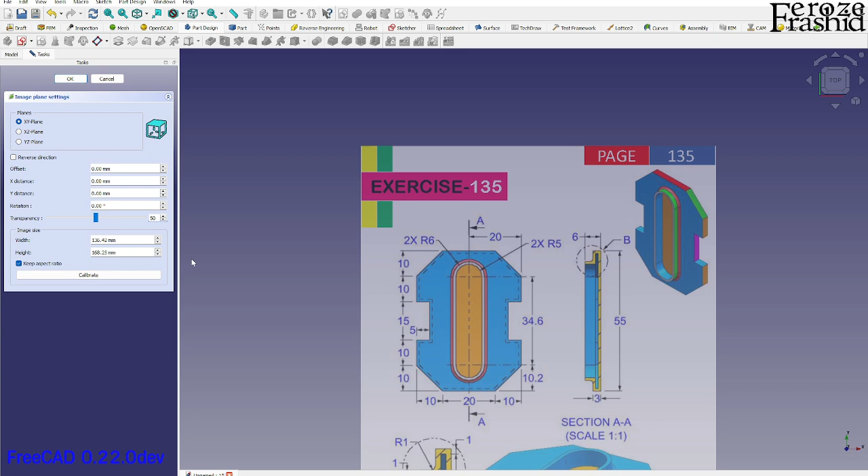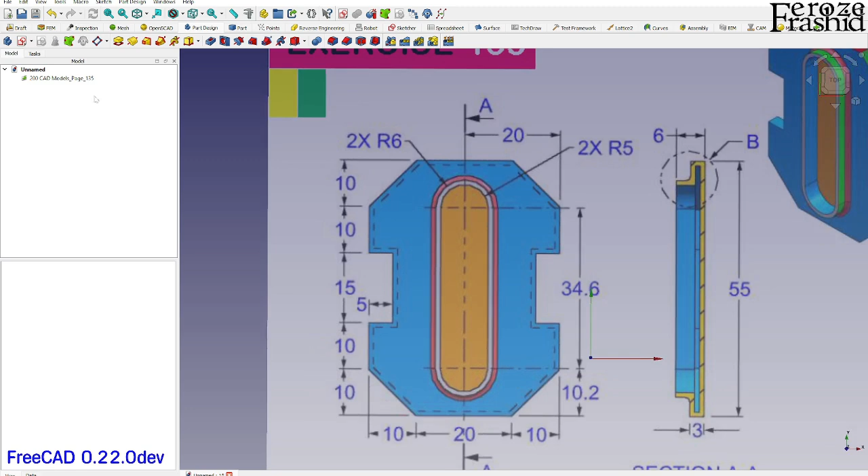I already worked on this in part workbench a couple days ago, and a suggestion was that this model building tree would be more efficient in part design workbench. So I had a little time, let's give this model a try in part design, which has a cleaner workflow especially.

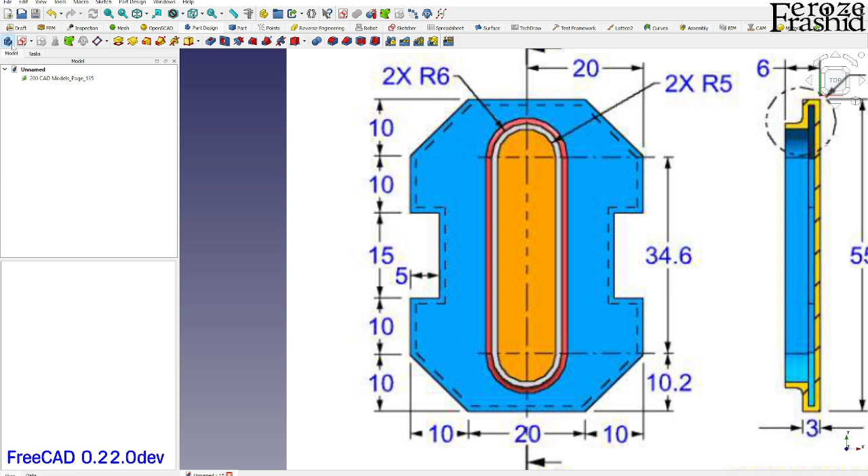Since we're going for an efficient way to build this, I want to build the whole thing with no mirroring involved, using this 0.22 developers version. In part design, I make a body and create a sketch on the XY plane after the generic setup.

I want to do the whole outside real quick, so it's a quick sketch of the outside using the polyline.

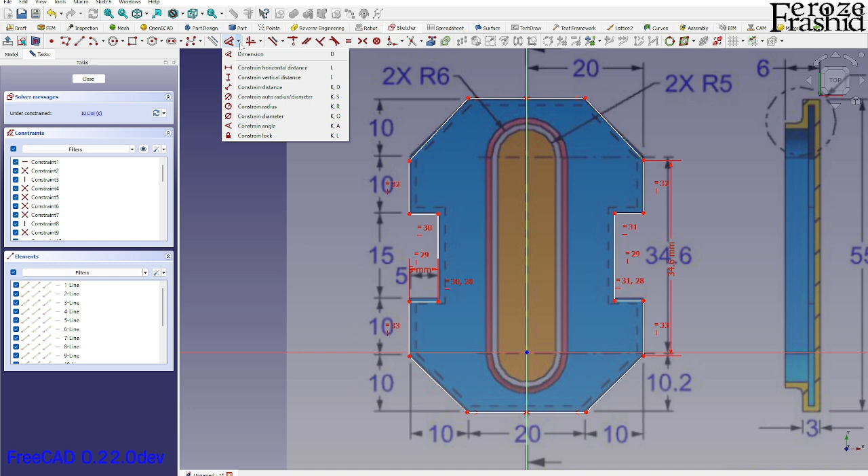All right, so I got the outside. I want to make this fully constrained, starting with this one, maybe 5. I'm using a lot of keyboard shortcuts, and the developers version helps with this process. For dimension, the smart dimension shortcut is D, and it applies the suitable dimension as it sees fit, though there are other options too. Now this is fully constrained, and we got the outside sketch boundary.

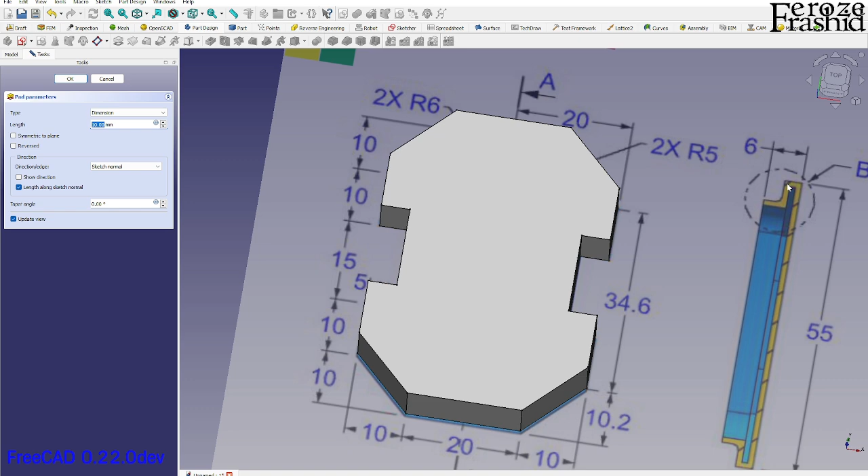That's one sketch, and I want to extrude that up for the whole 3 millimeters. I'll pad it for 3 millimeters.

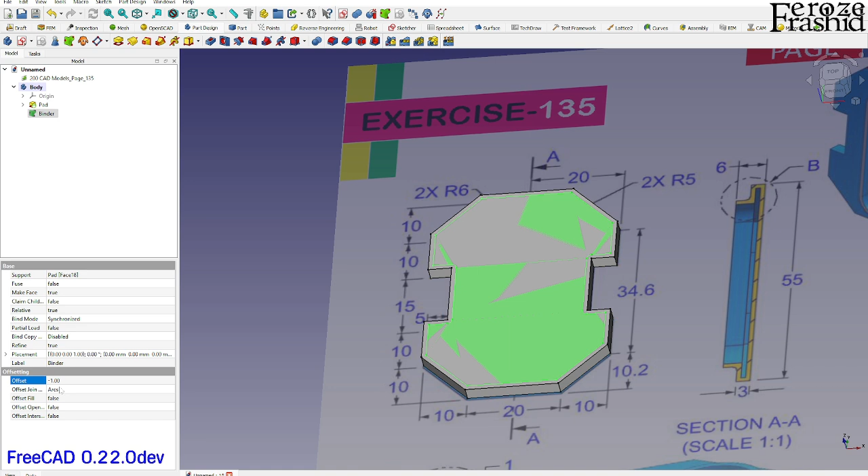Now we'll make 2 holes in the middle and another pad on top. This gap starts 1 millimeter from the bottom and finishes 1 millimeter below the top. I'll do that as a sub object shape binder, then offset this by -1, which is the wall thickness, and make it tangent for a sharp corner. Now this binder is sitting on top of the object, which is 3 millimeters.

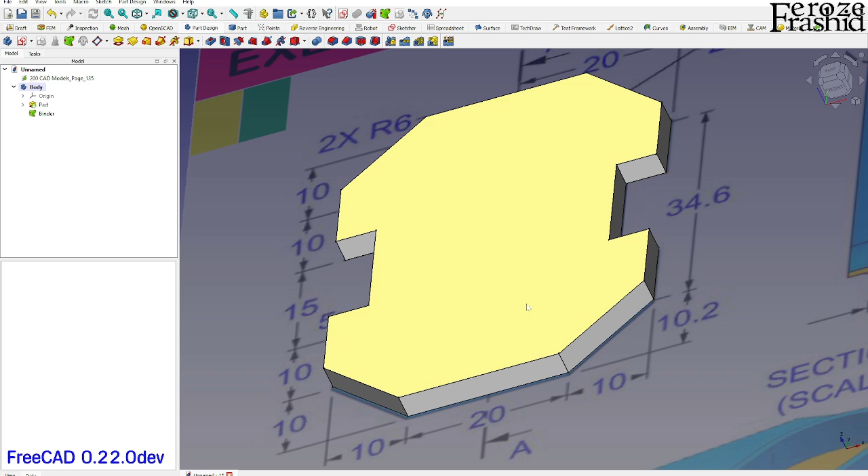I want to actually place it 2 millimeters down, so let's make it -2. Now you don't see it because it's inside there, but if I hover over it, I can see it's where we want it to be.

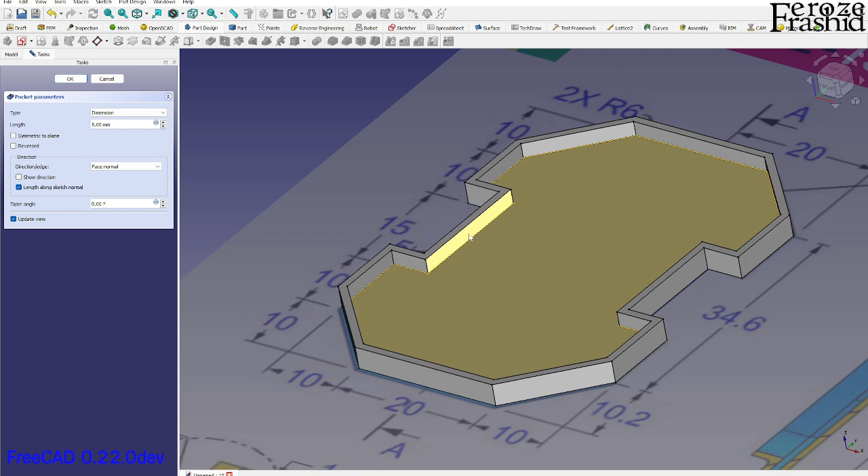Now I want to make a pocket. It's creating this whole thing because it's taking it upward, and the length dimension is what we want - lengthwise we want 1 millimeter is enough. Hit OK.

So now we have a pocket in the middle, and we can see how it looks if we take the body and make it transparent.

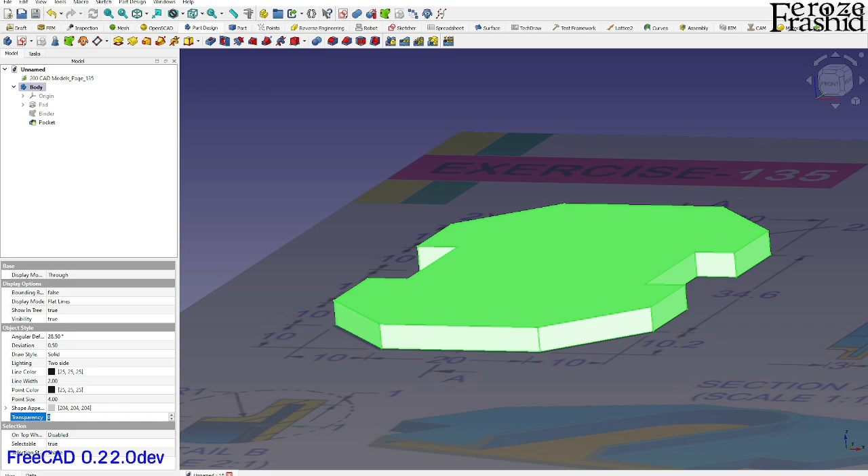By the way, if you hear a baby crying, that's my newborn, so consider that part of my video.

I don't see anything changed. Okay, transparency 50%, and I think the gap is there. Yes, if we hover over it, I can see there's a gap in the middle.

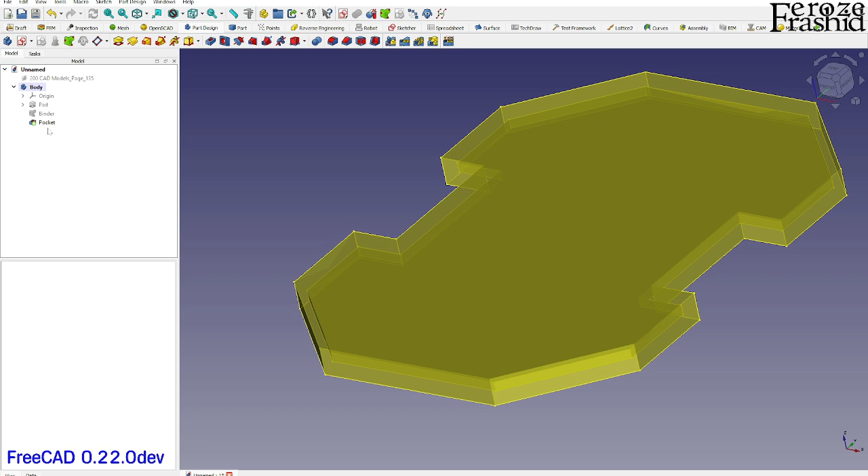Give me a minute, I'll make that more visible. The next step is to actually make that slotted hole, which we will draw as a slot on this face.

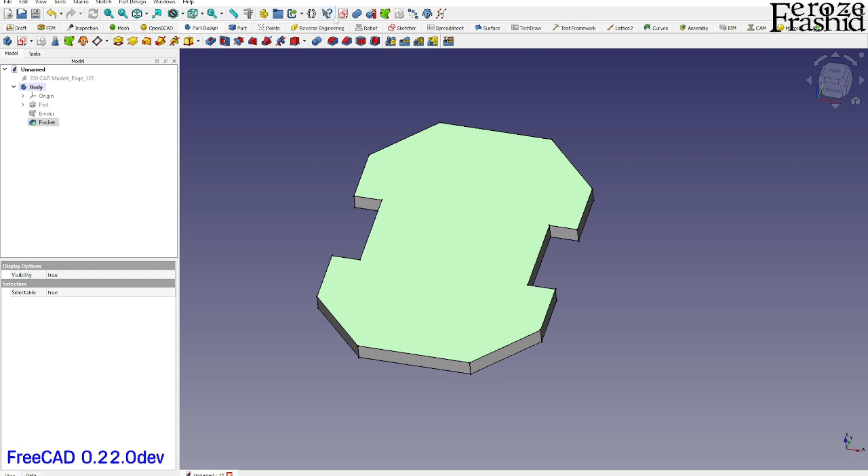I have the sketcher on my global toolbar, but that's from the sketcher workbench. I want to use the one from part design, because this places it inside the body we're working in - the other one places it outside. I'll use this one and draw a slot.

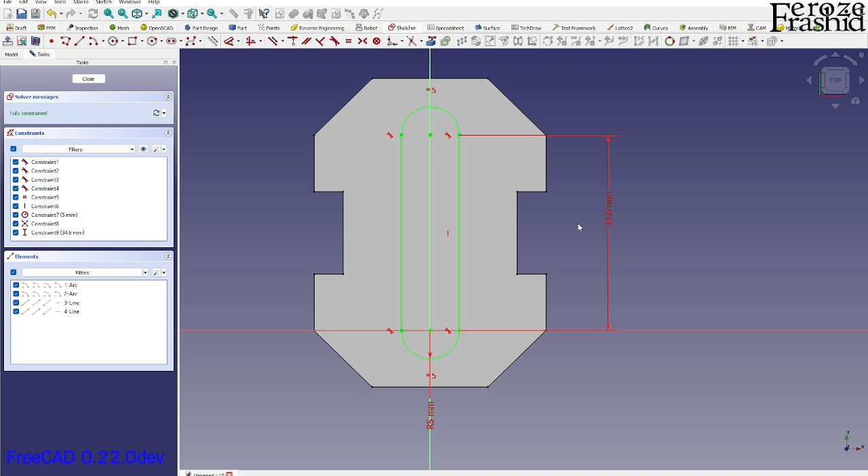This time it will just be a simple slot, and the radius I'll go with 5, and I'll verify that. I think this was 34.6, was it? Let's take a look - yes, 34.6, and the radius was 5. So we got it 5 on this one.

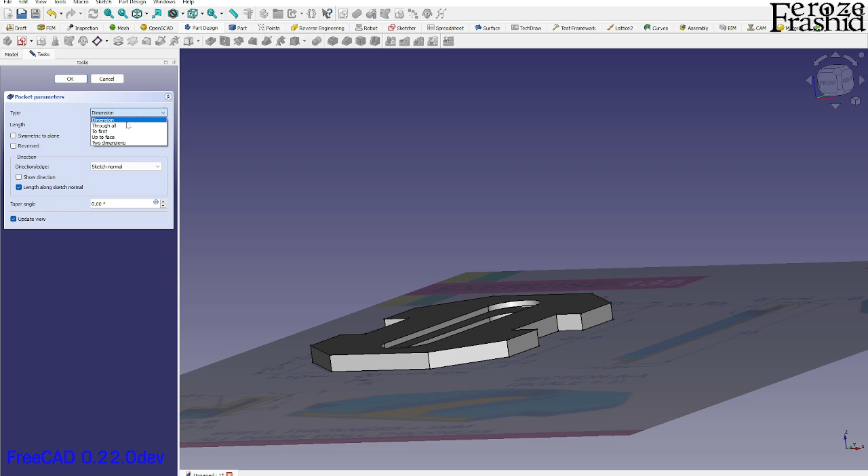So this is the slotted hole. Can we make a pocket to first? Yes, we can make that, and I think that worked.

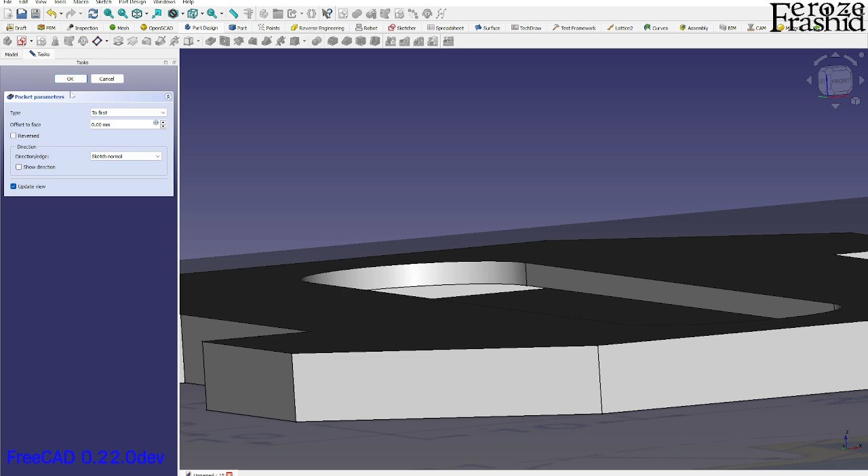What it does is take it downwards to the first surface it faces, which is the top of that hole we just built inside there. All right, we'll take that - so we got that hole built up.

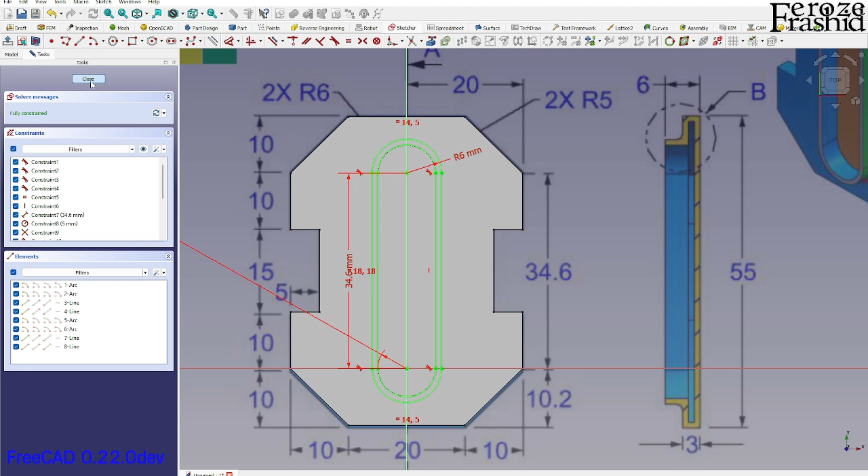The next step is to build this wall for 3 millimeters, with another sketch on this surface. We take the slot option, I'll say this is 6, and this would be equal to this.

So that is our wall of 1 millimeter. Let's say sketch wall, and pull it up for 3 millimeters - we don't want, okay there it is, and hit OK. Pretty cool, I think that is it - very easy in part design.

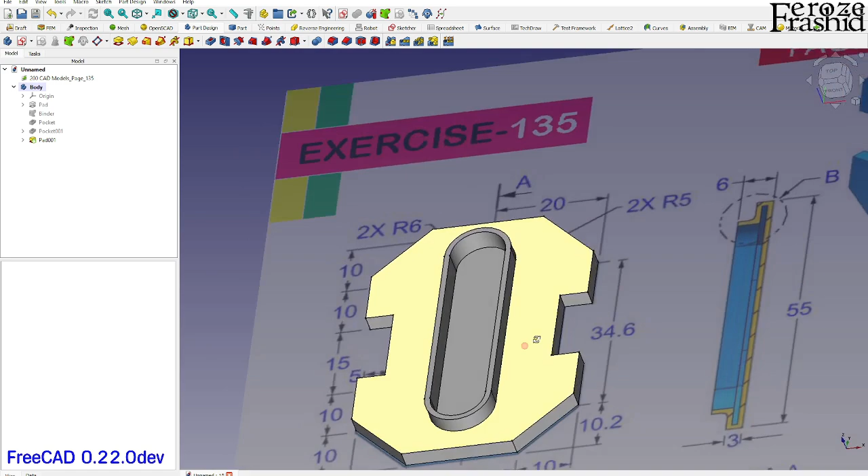I want to make a fillet, but I'm having trouble selecting this line. Let's go to the body in the view tab, switch flat lines to wireframe, and that is our line right there.

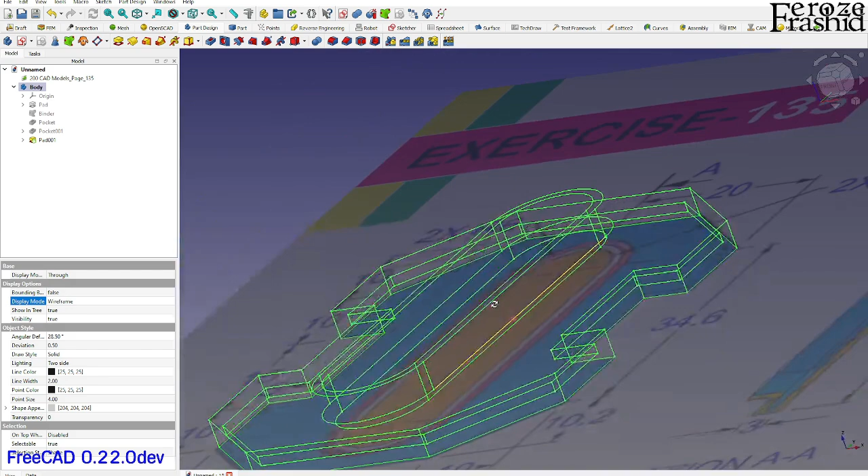I want to select the right line and apply a fillet of 1 millimeter. Then go change it back to flat lines. I think it worked - let's make sure that fillet was 1 millimeter first. Yes, it does look like a 1 millimeter fillet.

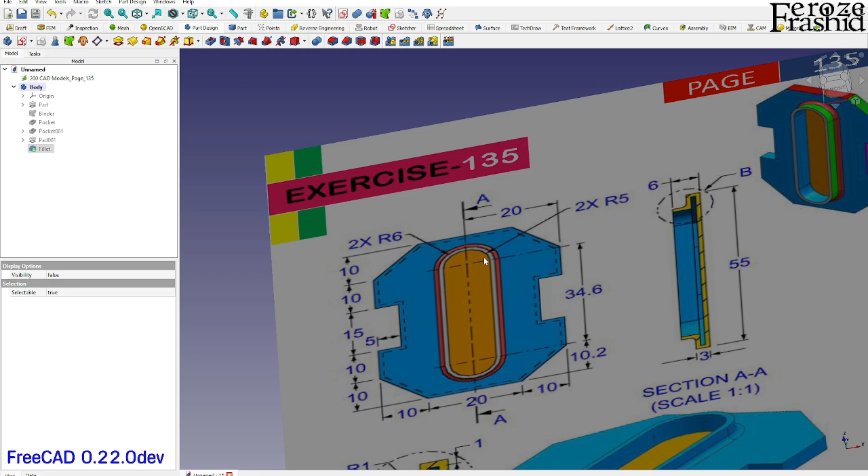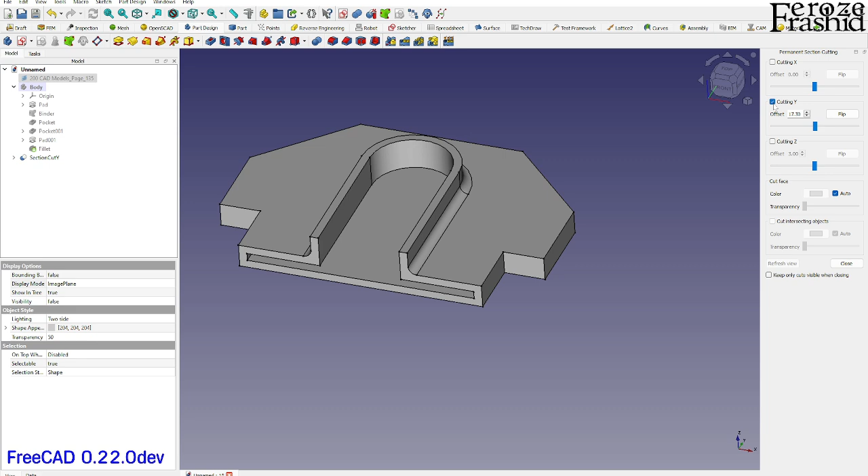And this is our object. Let's take a look at the cross section. I want to go to view and say persistent section cut, cutting Y, hit OK. I want to hide this body and keep the section cut visible - so this is 1 millimeter thickness all around, and we have the gap in there.

Pretty cool, so I do agree that part design offers a cleaner workflow for this object, which has always been the distinction between part and part design. So there is that.